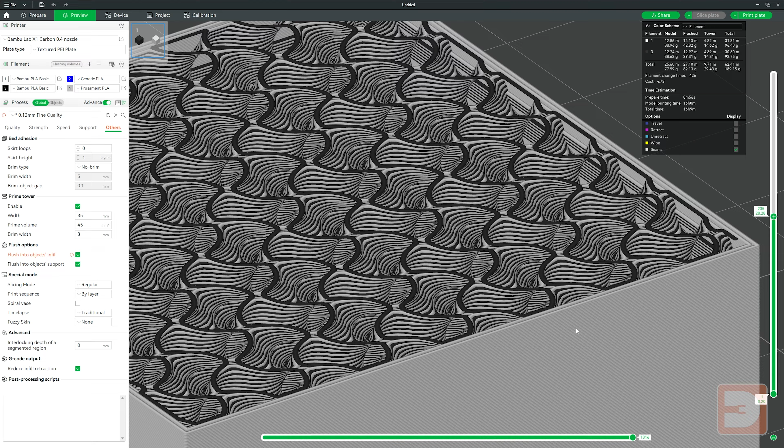If you then have a darker colour in your infill, you may start to see the shapes of that infill bleeding through the semi-transparent outer layer and therefore ruin the aesthetics of your print. Equally, you may want to print a thin, light external layer to then blend with a different colour below it, therefore changing the colour of that section.

If you were to print a couple of layers of white over a layer of black, then you're going to see through that white and then it's going to become a grey. In this video, we're going to look at how you can specify the depth that the colour penetrates inside the model. Let's have a look.

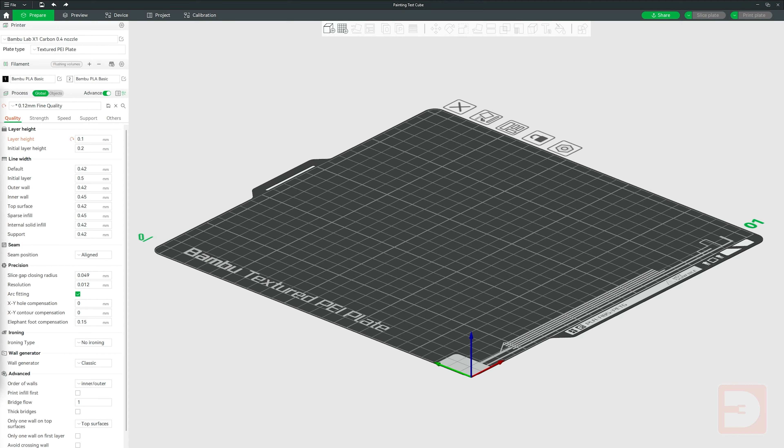For the purpose of this video, we don't need a complicated model, so I'm just going to right click on the print bed, go to add primitive and then select cube. With it selected, I'm going to go up to scale and just set it to 20mm cubed, just so we've got a nice round number. With it selected again, if I go up to the paint tool, highlight the other filament and then select the fill tool, I can then fill one side of this cube as white.

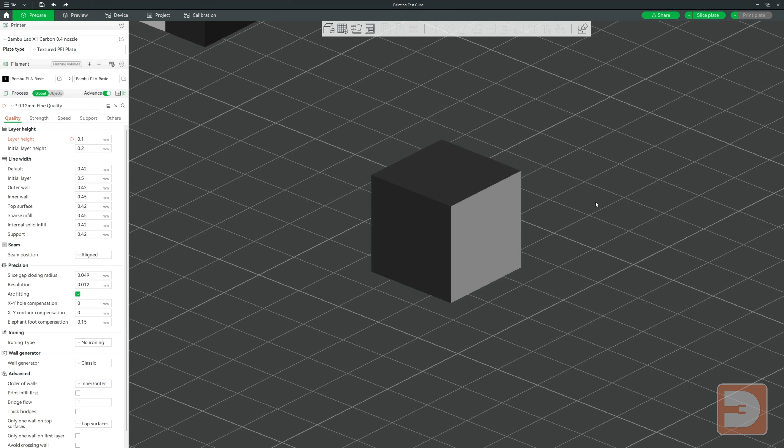As you can see, this is an entirely black cube that has just had one flat side painted white. No other painting has been applied to it. If I slice it now, however, and go down through the layers, you can see that there is a triangle of the white filament that has fed into the middle of the model. If you look at the areas where the white and the black filaments meet, there are two sets of perimeter walls, one for each colour.

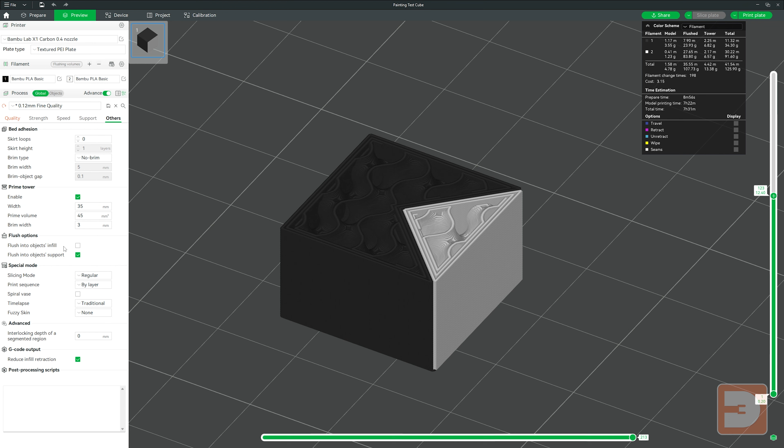If we now switch this to flush into objects infill mode and slice again, you can now see that this black and white infill is used in both sections, both the black area and the white area. With the white area, you would then start seeing this black infill feeding through this thin external wall.

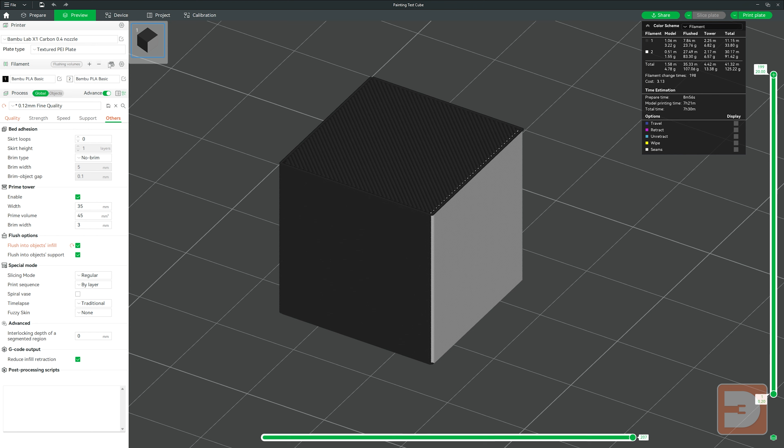If I jump back into the Prepare tab and then with the cube selected again, select the Paint tool and then this time the Circle brush, then paint on a little section over here, and then if I turn off Flush into Objects Infill just so it's easy to see and slice again, now when I go down through the layers you will see that just this little patch here has also fed quite a deep line into the middle of the model, but you have no control over how deep this goes or what shape it takes.

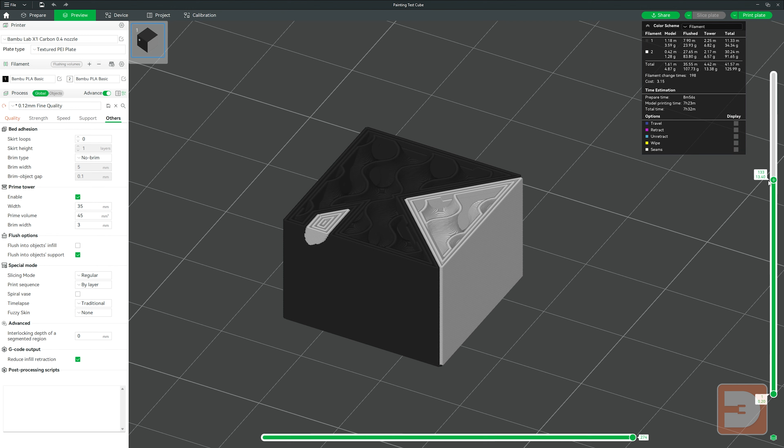There is, however, a way to specify specific colours in specific shapes and sizes inside the model itself. So let's erase the painting on this cube for now and actually make it a white cube to make it easier to show. I'm now going to right click on the cube, go down to Add Modifier, and I'm going to select a cube, but you can select any modifier shape or collection of shapes for your purpose.

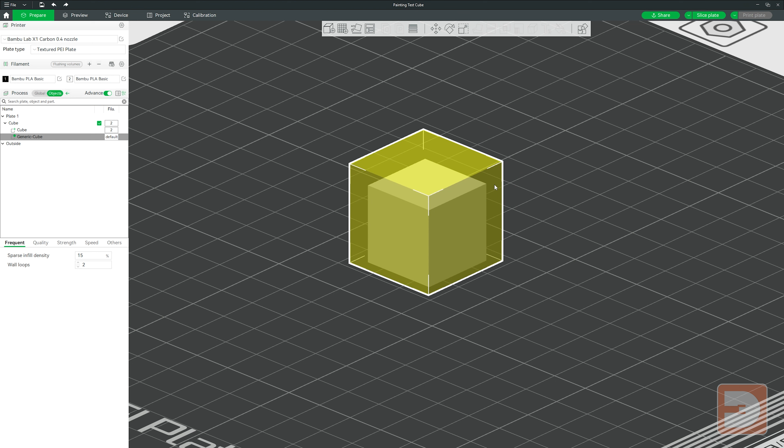Then I'm going to scale my modifier cube. I'll just shrink it down with a uniform scale for now. Then I'll turn off uniform scale and stretch out the y-axis of the modifying cube so you can now see that it is sticking out both ends of our cube body.

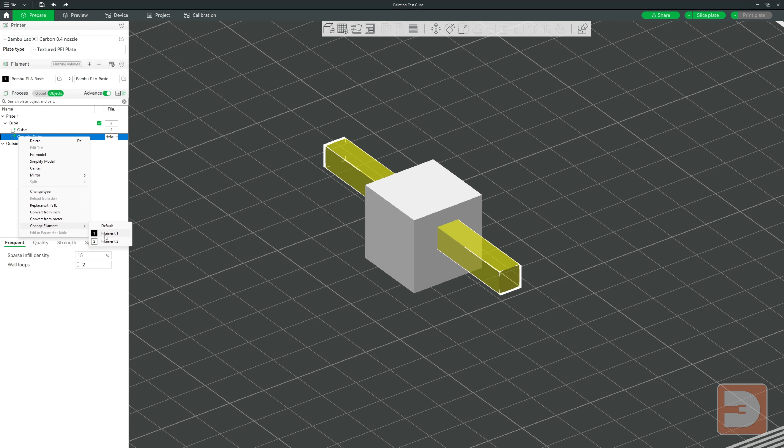You could also see that it has now been nested underneath the cube on the object list on the left. And this means that the modifier will only affect that one object which is nested underneath. If I then right click on our modifier cube, go to Change Filament and select another filament,

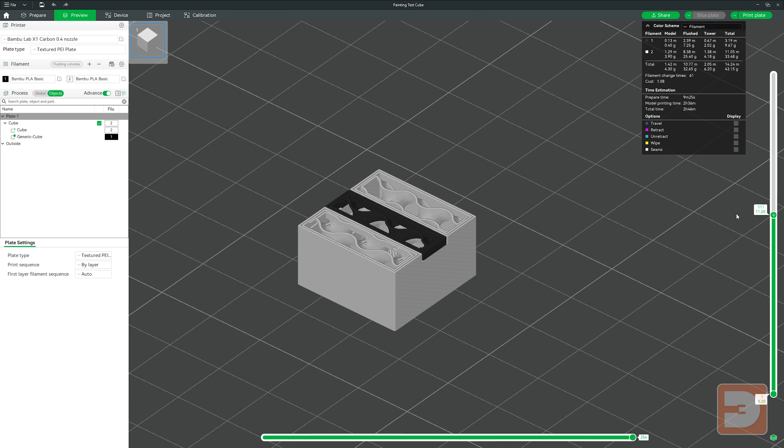again, you will see that the modifier is sticking out both sides of the cube, but as we slice it now, you'll then see that it is not sticking out the sides, but it has simply painted the faces at the points where the modifier was in contact with them. And as we go down through the layers, you'll see that the modifier has perfectly painted its volume within the cube.

However, as this is just a straight shape, sometimes if you're using different materials rather than different colours of the same material, they may not fuse, and as there's nothing holding them physically in place, it can just slide out. Normally, you'd use the interlocking depth of segmented region setting here, which I covered more in a recent video and I'll link to it in the description below.

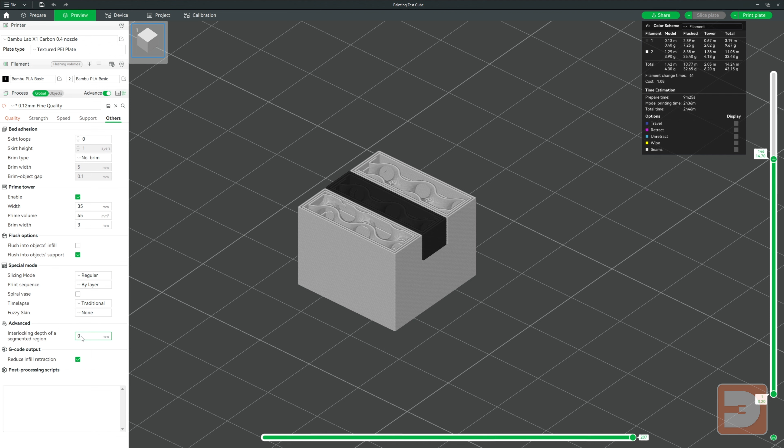But what this feature normally does is any areas that are painted with a different material, it will have interlocking lines running through it from the dominant or default material of that model. Unfortunately, it doesn't work when you're painting using modifier shapes. So the solution is effectively to manually create interlocking layers by using further modifying shapes.

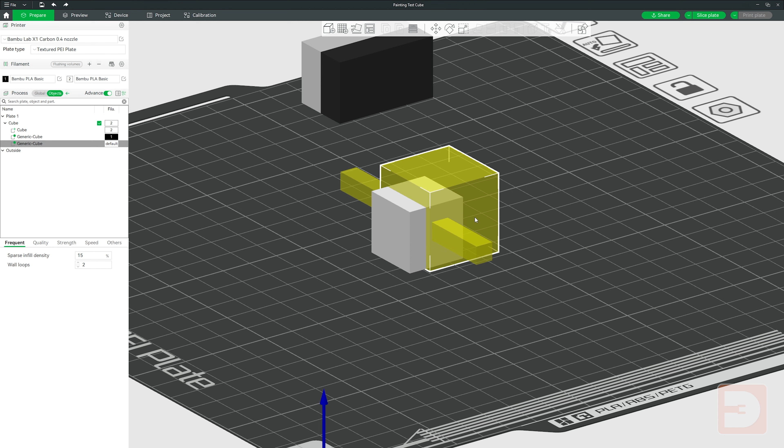So to do that, I'm going to create another cube, and I'll position it roughly over where the original modifier is. I'm then going to scale this down to a smaller size than our original modifier, and I'm going to stretch it out in the opposite direction to the way that the original one runs through our model.

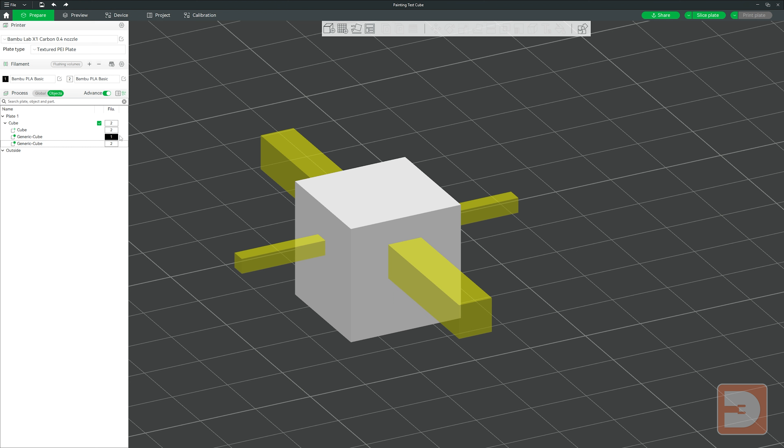I will then go over to the item in the object list, and you can see by default it is set to the default filament of the model. This would be the same filament that is applied to the cube itself, which is what we want, but I am going to manually apply this just to be sure with white, because that is what we're after. Obviously, because the original modifying cube is set to black, we want the interlocking lines to be the same filament that the rest of the model is printed in.

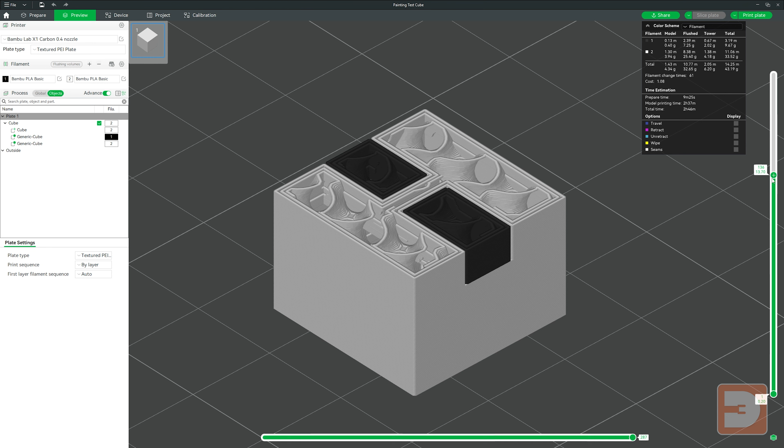And if I now slice again, you'll see that an interlocking line has been created. Not only is there an area of white running through our black modifying cube, but it is sharing the wall perimeters with the default filament of the print, so in this case white. This means it's not just printing a third small object with its own independent perimeter walls inside our black insert in our object, but it will be fused with the bulk of the model and therefore will be held in place. So that's how you can add depth information to color in Bambu Studio.

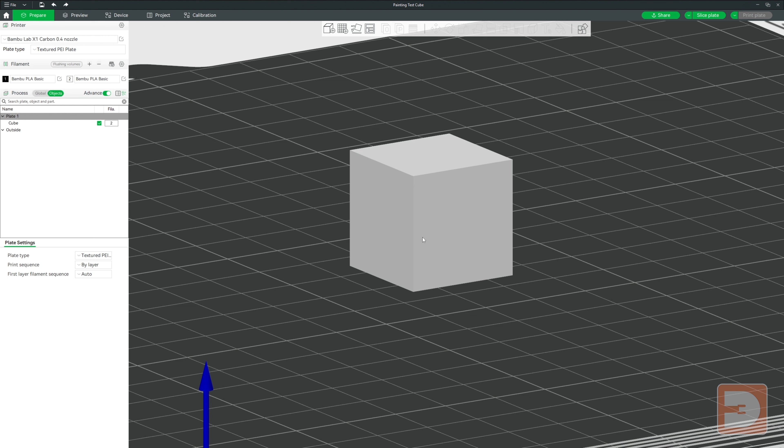Now we're going to look at how you can blend colors by defining how deep a color starts and therefore how transparent the outer layer is, causing the colors to blend with each other. For this example, I want to make the lower half of this face of the cube grey just using white and black filaments. To do that, I need to place a black area just inside the white cube, thick enough to allow 1 or 2 walls of white before it transitions, therefore making the white slightly see-through and blending with the color below, in this case black.

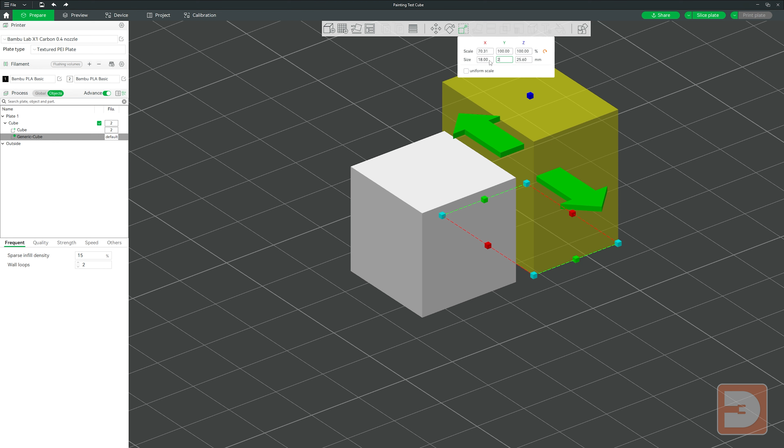So again, my first step is going to be right-clicking on the object and then going to add modifier, and I'm going to select a cube again. I'm now going to scale it so it's going to roughly approximate half of this cube's face, but I'll add a 1mm border around the edges of it, and I made it 2mm deep, so that should be enough to make a nice bold black area that will show up through the white.

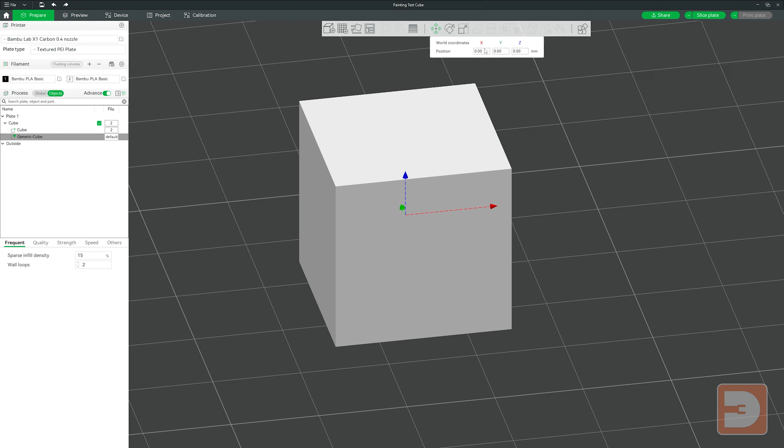Now you'll notice when I go into move with the modifier selected, the axes are positioned in the center, and you'll notice at the top here it says world coordinates. The world coordinates for a modifier which is nested within an object is the center of the object it is nested in.

So at 0,0,0, that is right in the center of our object cube. It's worth mentioning that if you had an object selected rather than a modifier, the world coordinates would refer to the coordinates of the print bed, not of the object itself.

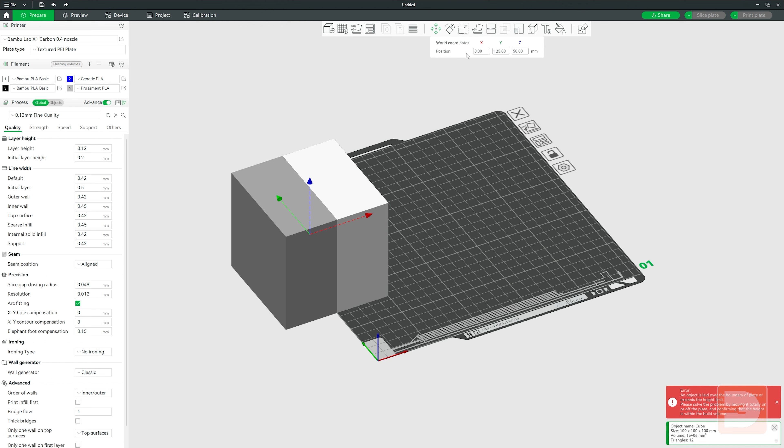The origin point for this varies depending on what printer you're using, but for most, including the Bambu printers, the origin point is in the bottom left of the print plate. So what this means is if you were to set the world coordinates for an object to 0,0,0, it would position the center of that object in the left corner of the print plate.

If we jump back to having this in the middle of the build plate now, you will see that the coordinates for this size build plate would then mean that the position coordinates are 125 by 125 millimeters, and then the z-axis would be half of the object's height, because the object coordinates are based on the center of the object, and 0 would be on the build plate.

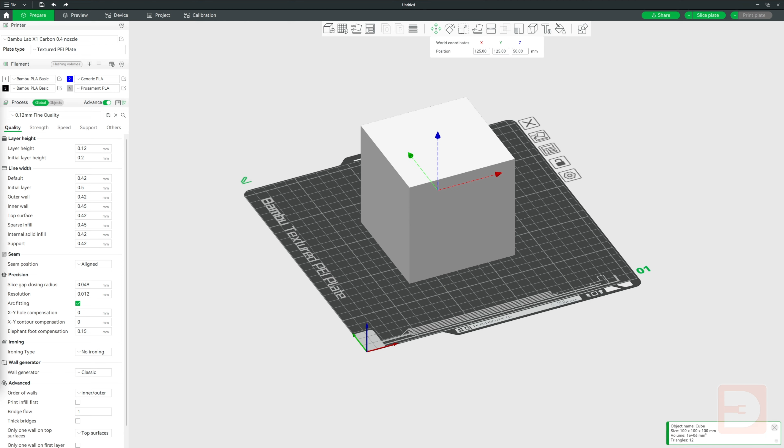So back to the modifier positions now, remember that these coordinates are relative to the center of your object. If you set these and then move your object, the modifier will move relative to however the object has been moved. You don't need to adjust these again as well.

If you want your exterior color to be printed thin enough to blend with the color below, bear in mind that if you're doing this on the side of your model, it is going to be relevant to your line width. If you're using a 0.4mm nozzle, the line width is by default set to 0.42mm, meaning that your gap between the outside wall and where your different color starts needs to be bigger than 0.42mm, or whatever the multiple of that is you want for lines.

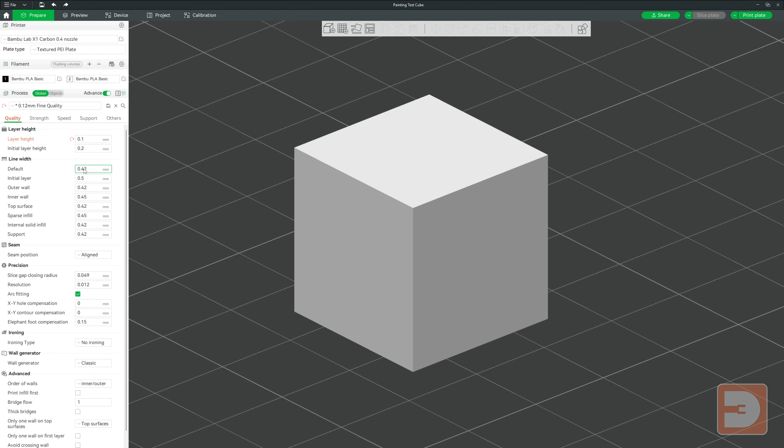If you wanted it to be 2 lines thick, you'd need it to be at least 0.84mm thick. So let's get our modifier changed to a different color.

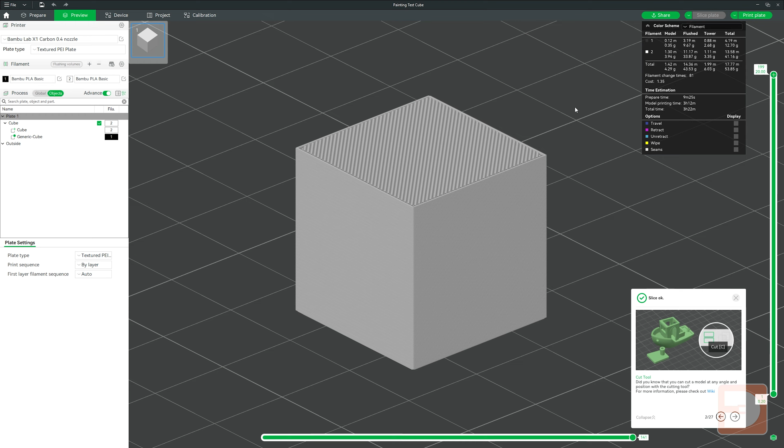So let's change this to black, and then we want to slice again and see how this comes out. So with this sliced, you can see we just have a perfectly white cube on the outside. There is no visible black lines anywhere on the outside of this cube.

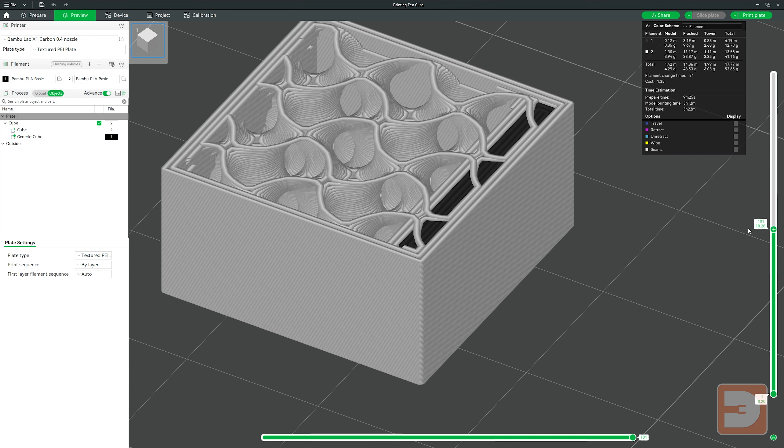And as we roll down through the layers of this cube, suddenly we start to see the black modifier that we have placed in there. There is only one layer between the outside wall and the beginning of the black, which means that this should become a nice grey area in our print.

With the 1mm border that I added to the edges, it should be less obvious from the side faces because there is now 3 layers of white before it hits that black.

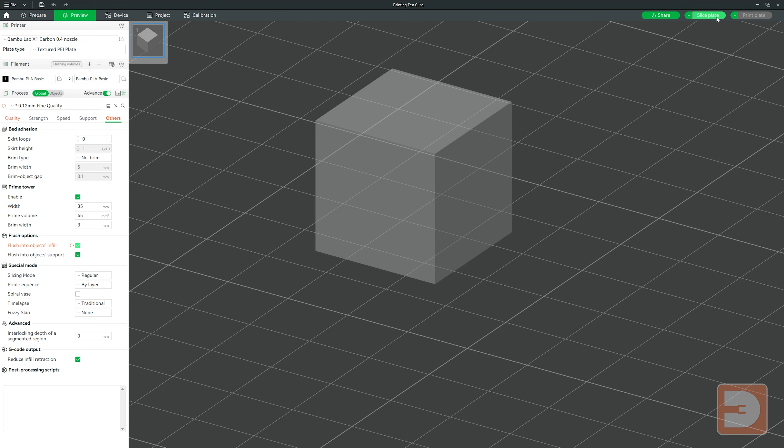Now, if you have flush into infill turned on, obviously this is flushing to infill, not the walls. So your wall perimeter between the white and the black won't be affected, and it also does not then flush to the areas you've colored with your modifier.

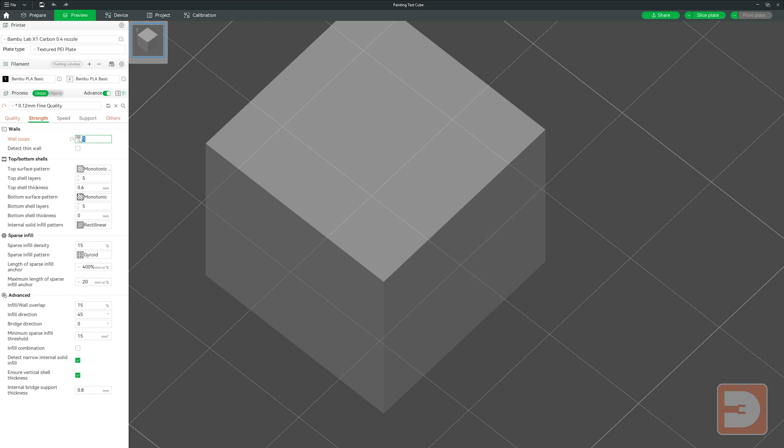If, however, you just wanted to block the visibility of the different colors of your infill through your outer walls, just increase the number of wall loops you've got, as they're not going to have different colors flushed into the walls, only the infill. Increasing your wall loops to 5 or 6 is going to more than ensure that you're not going to be able to see the colors of your infill through your outside walls.